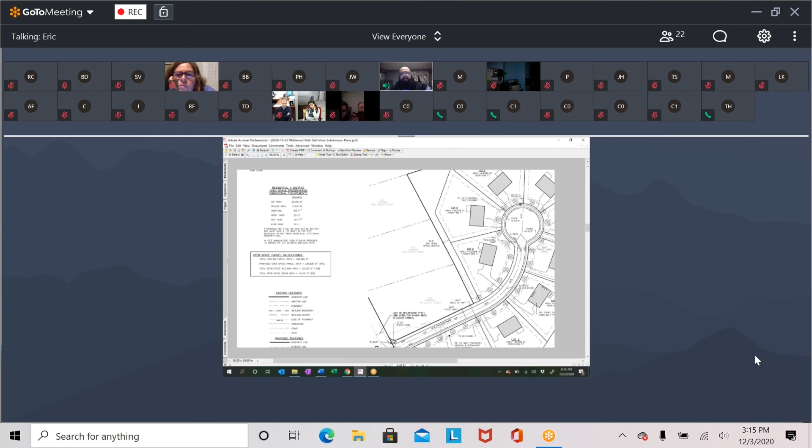We have exceeded the amount of open space required by the bylaw. In fact, if I can zoom in a little bit here, we're required to have 40%. We're at 47% open space, and that open space does contain our proposed stormwater basin, which I'll touch on in just a moment, but it is still under the threshold of what's allowable for man-made impervious structures on the open space parcel. We're proposing a roadway of just over 600 feet long. It comes to 637.5 feet long.

Standard pavement width of 22 feet, but we have proposed some waivers for the roadway cross-section to provide a right-of-way that is 40 feet wide, rather than the 50-foot wide right-of-way. I think the board has seen this before on similar open space subdivisions. It's a technique that's used really to maximize open space elsewhere and try to get the most bang for the buck there. But we are maintaining the 22-foot required paved width.

We are proposing sidewalk along one side of the roadway on the south and eastern side. That sidewalk will wrap around the cul-de-sac. We are not proposing sidewalk on the northern western side of the roadway. In its existing condition, there is no sidewalk or even curbing on Locust Street. So really 2 sidewalks, a sidewalk on either side of the street here, especially for the level of pedestrian service that we feel that we'll need, is just overkill.

Very similar with curbing, we've requested a waiver to get away from the vertical granite curbing. We are proposing granite curbing at the radii connection to Locust Street, but aside from that, we're looking at bituminous Cape Cod berm around the proposed cross-section.

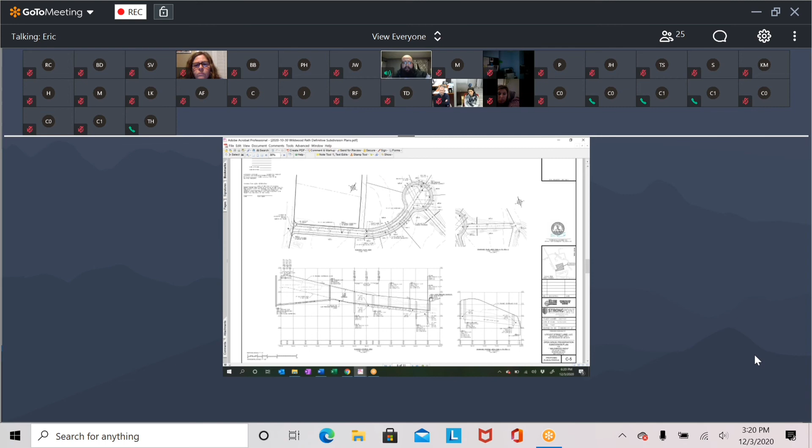Just to move through the plan set a little bit more, we have our proposed profiles that show the cut and fills that we talked about. We're matching grades very well, with the exception of the cul-de-sac. We've got about a 4-foot level of fill at the cul-de-sac, but that allows us again to have those walkout basements and really match grades around the houses a bit.

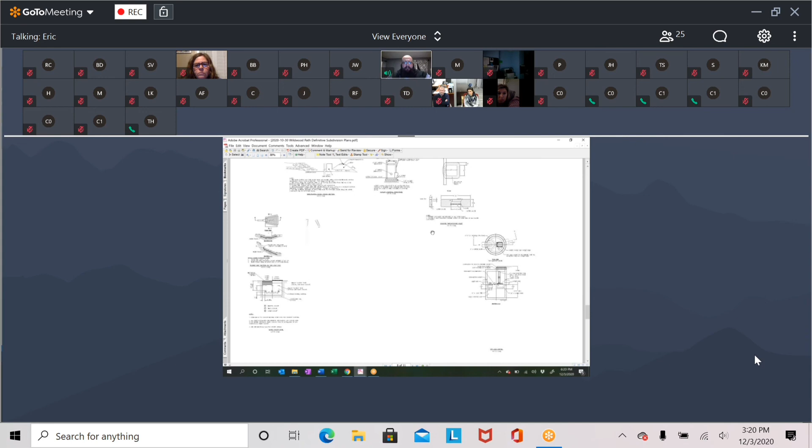We provided a full erosion and sedimentation control plan in accord with the town's requirements and the requirements of the EPA's NPDES program. And then a couple of detail sheets that I won't bother going into in too much detail, no pun intended.

And then the last sheet in our plan set is the conventional lotting plan, the proof plan, if you will, that shows that in a conventional subdivision, we could subdivide this lot into 9 single-family home lots. And that's what justifies the lot yield for the proposed open space preservation plan. So certainly this plan is the key to the special permit that we've submitted.

And then lastly, we like to provide a graphic that shows an overlay of the lot and what we're proposing, to see how it fits into the surrounding communities. Obviously, Locust Street is here, Everett Drive is over here. This gives a good approximation of where houses will sit in relation to other houses, in relation to the property lines. It shows where our limits of clearing will be. We're providing a pretty substantial buffer all the way around this property, protecting the open space.

Excuse me. I should also mention we've requested a number of waivers for this project from certain requirements of the subdivision bylaw. I can certainly go through those in any degree of detail that the board feels necessary, but I do want to note of 15 of the waivers that we proposed, I believe 7 or 8 of them are related specifically to the cross-section of the roadway. So rather than just request a blanket waiver, we've identified each particular section of the bylaw that would apply.

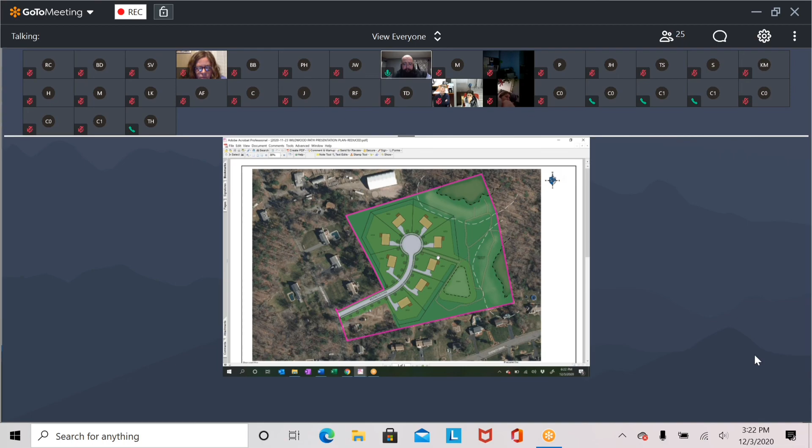I guess late today, you hopefully received correspondence from the town engineer? I don't believe I did receive anything from the town engineer. I can check my email right now. Oh, no, it's okay. If you haven't had time to look at it, you haven't had time to look at it. You do know there's an issue with the road opening, because the road was just repaved. Yes, I do know that there's been some discussion about a moratorium in place, and we will have to coordinate that with the highway department.

Some things that jumped out at me. You're going to have a sidewalk, but you don't want to have granite curbing on that side? Excuse me, I misspoke. We do have granite curbing on the side of the sidewalk. We have Cape Cod berm on the opposite side of the roadway where there is no sidewalk. That's my mistake. Okay.

The stormwater parcel, drainage parcel, you're gonna have a fence around it, and what is the slope? The basin itself is designed at a 3-to-1 slope. We have not proposed a fence around the basin at this point. It's funny you mentioned that. When we were before the board informally, one of the matters before us was a discussion about fencing around basins. And I don't know that it was clear that fencing is required or preferred in this case. So frankly, I am comfortable to put a fence or to not put a fence. I would defer to the wish of the board at that point. There's some internal discussion on that for sure.

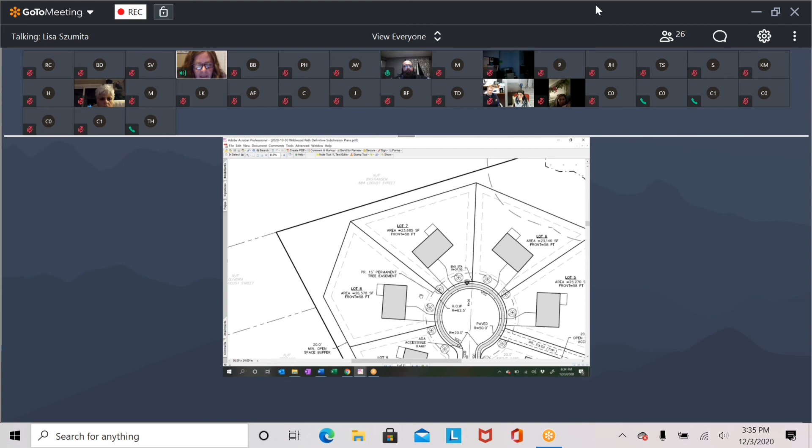My name is Lisa Szumita. I'm on Everett Drive on the other side of that parcel, and we had the same issue that we were hoping for. I think I'm speaking for most of my neighbors as well, that we wanted to have a buffer zone on our side as well, a buffer strip. And I was looking at the planning board regulations, and it says the buffer strip's supposed to be no less than 50 feet in width for an adjoining lot. So we just wanted to make sure that we didn't lose any of our privacy that we've had for all these years, that we've loved. So we're hoping that that could be taken care of as well.

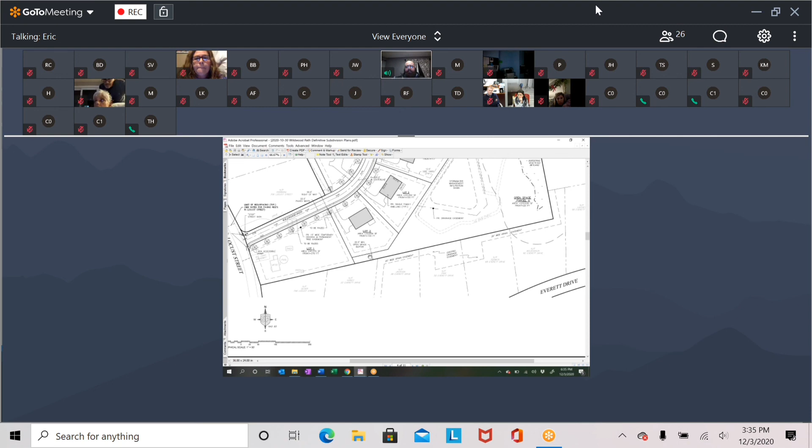So, Mr. Chair, if I may, this area here, again, is where we're proposing a minimum of a 20-foot open space, and this is right behind, and I don't know if these names are current, but this is Hardy and Jackson here. There's also a 20-foot wide drainage easement over the Jackson property here. From this location, it actually gets quite a bit wider through here. So we're talking about a 100-foot span where we put a 20-foot buffer strip, and then it widens out from there. If it's something to please the board, we could always look at doing a small no-cut easement on this lot; it would provide for another 10 or 15 feet to just make that buffer strip a little bit more substantial there.

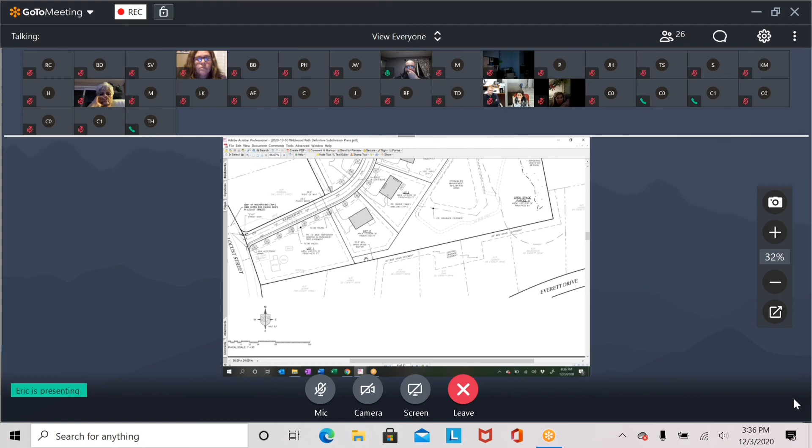One comment I want to make with regard to the required width of the buffer strip: what the bylaw says is that the board can impose a 50-foot wide but contiguous buffer if they feel it's appropriate. It's not a minimum requirement in this case. Tell me about that drainage easement. That doesn't affect the parcel we're talking about, does it? No, this drainage easement is completely off of our parcel. It backs up to the parcel. Okay. Did that answer your question, ma'am?

Yes, it looks like it's not going to affect me as much as it is some of my neighbors closer up the top of the street, but they were looking to see, I know the new neighborhood that went in off of Bar Street on Granite Street, they put in just a row of, I think, spruce trees, privacy, and so maybe if something like that could be done, just to keep that feeling of forest in that area. Not as much for me, but it looks like my neighbors need it more at the top of the street.

I mean, what they could do, this is Chris again, there's only one small section that has only a 20-foot buffer, and then it opens up to 50 to an excess of 100 feet. You could, in that short section with its 20 feet, maybe enhance it with some white pines. They start out small, but they fill in quite nice. And we would be open to that. I don't take exception to that at all. And you could dig them right out of your property. You could just simply move them. Yeah, you're right. I like cedars and arborvitaes better than white pines personally, but we can talk about that.

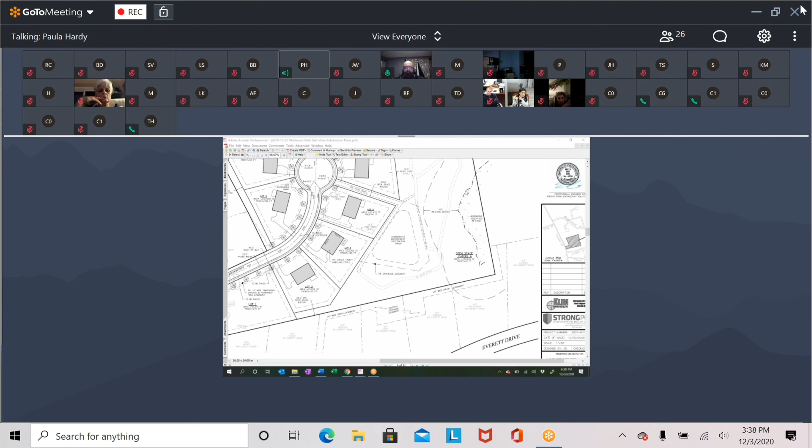Yes, this is Paula Hardy from 22 Everett Drive. So I am one of the ones that are impacted by that. So can you just repeat what you just stated, are you going to leave it at the 20 feet and add some additional trees? Or is the plan to give us additional buffer in that space?

Yeah, that's my thought, added trees or shrubbery in that space. What's there now? Do we have any say in the type of shrubbery or trees that will be placed there? You could have suggestions, yes. Okay. Could we also have it farther than the 20 feet? I know you said up to 50 feet, how can we get some additional space? 20 feet is not very much.

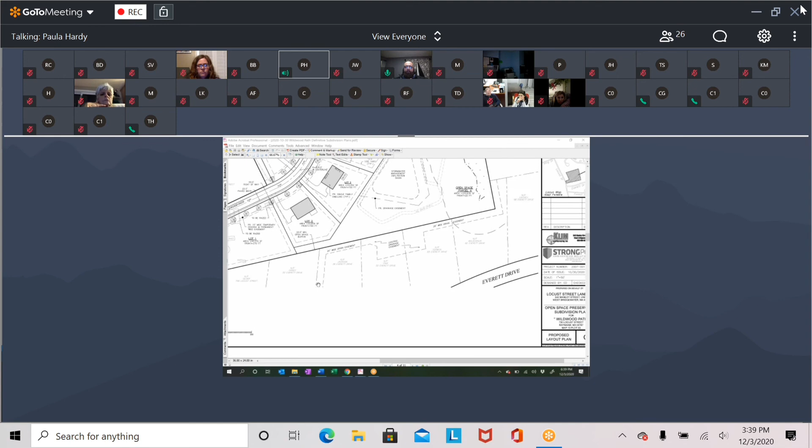Well, what we could do, Mr. Chair, if I might make a suggestion, I'm just going over to my grading sheet here. You'll see this line here is our proposed tree line. So we've got a 20-foot buffer zone, and we're not even proposing to clear within 20 feet of the property line. So what we could do is, along this line that I just crudely drew in here, add another 20-foot no-cut easement. That would effectively give a 40-foot buffer zone of natural trees there.

And I think if we did that, we would do that in lieu of additional plantings, because I feel like the additional plantings would be overkill. But we would be willing to give, on this lot in particular, a no-cut easement to provide a better visual buffer between the house on lot 2 and the Hardy and Jackson properties. Okay, talk to your client about that. Anyone else?

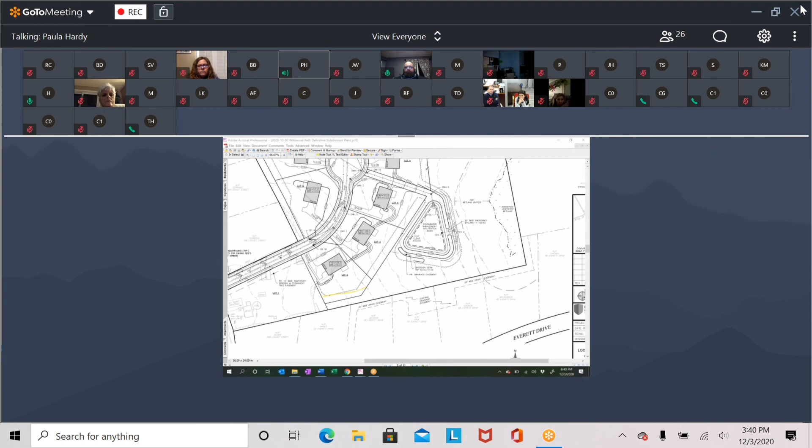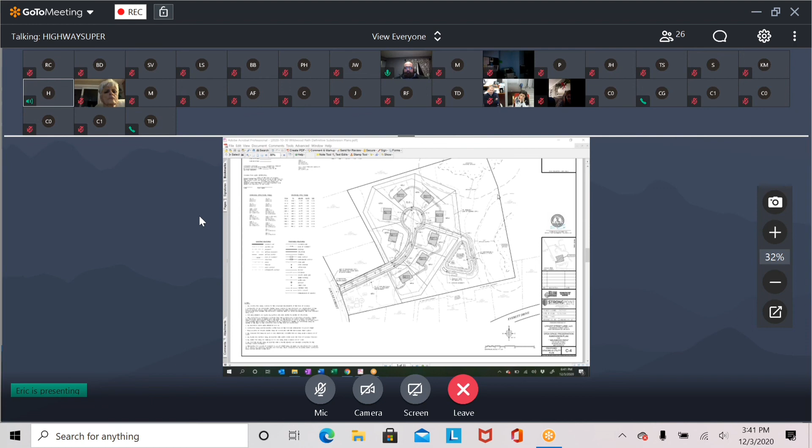I do have some comments. This is Ed from the Highway Department. I do have some comments regarding the project. Yes, Ed. Having a little problem with my microphone. I just wanted to advise the board, I sent out an email today regarding the road moratorium, separate from the review of the subdivision project. When we reviewed the project with Midge, we did it without regard to the road moratorium and just looked at the plans as they stand. So my comments regarding the subdivision are separate from the road moratorium issue.

I warned the engineer about the road opening issue. He understands and will be in touch with you. Understood. Anything else, Ed? Just that Steve and I had discussed adding 2 catch basins at the mouth of the road at the entrance to Locust to take any storm water in that location. Okay, isn't that a high point, the entrance?

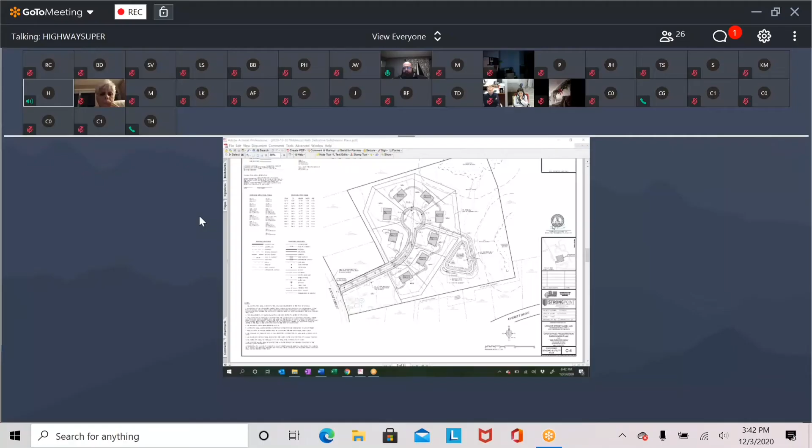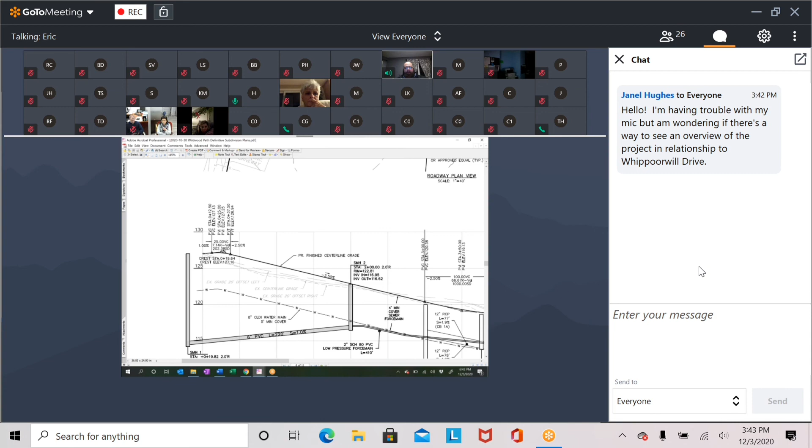What's that? The entrance where the road hits Locust. Is that a high point, a low point? Is it along a slope? I'm not averse to adding catch basins, but not if they're not gonna do anything. If I may, we actually graded a high point at Station 25 on purpose so that our water isn't sloping toward Locust, and Locust's water isn't really coming to where we are. So if there are catch basins there, they would only be taking about 25 feet of runoff from our proposed roadway.

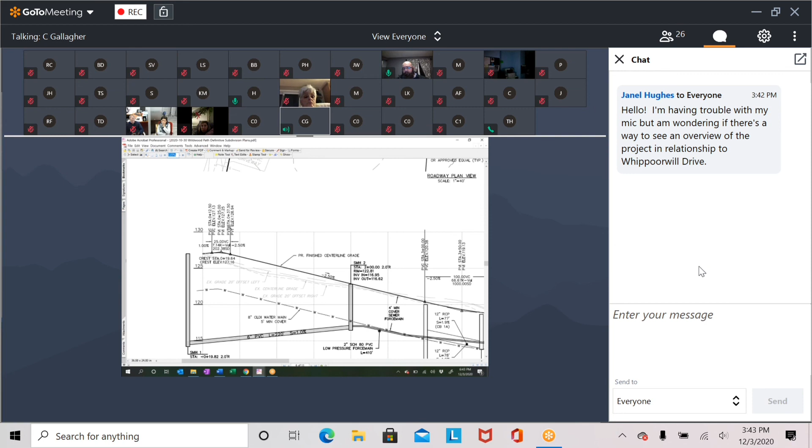Well, not really what I'm asking you. I don't have your topo sheet, I'll look at it. I'm asking about the topo on Locust Street itself. In other words, if your subdivision is entering at a higher point, then it's a waste of time putting catch basins. If it's entering at a low point that could be problematic, it might make sense to do that. Yes, I will certainly look at that. Yeah, you need to know what's going on Locust Street before you make that judgment.

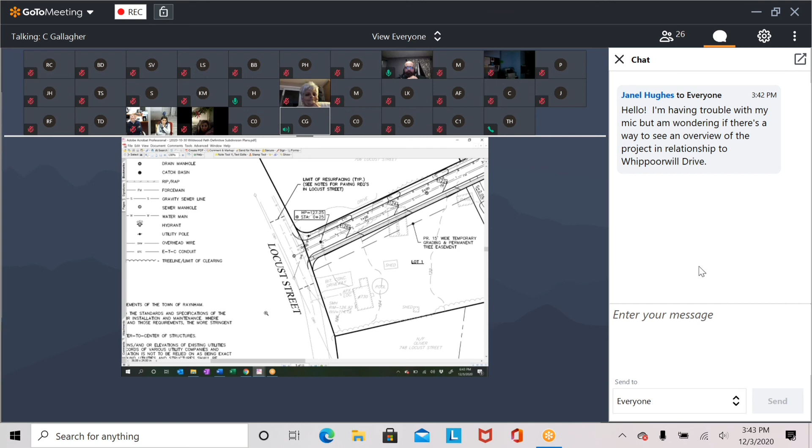Kirk, you see that question on the right? Yeah, if it's high, make sure we get accommodation for drainage on Locust Street. No, I don't see it. The question on the right-hand side, from Janel Hughes. Oh, right, I know what you're talking about. Because if you do take drainage off Locust Street, it may end up making your basin inadequate. So it would have to be coupled with an increase in basin size probably. That's right. That'd be down the line, on the town if they went that way.

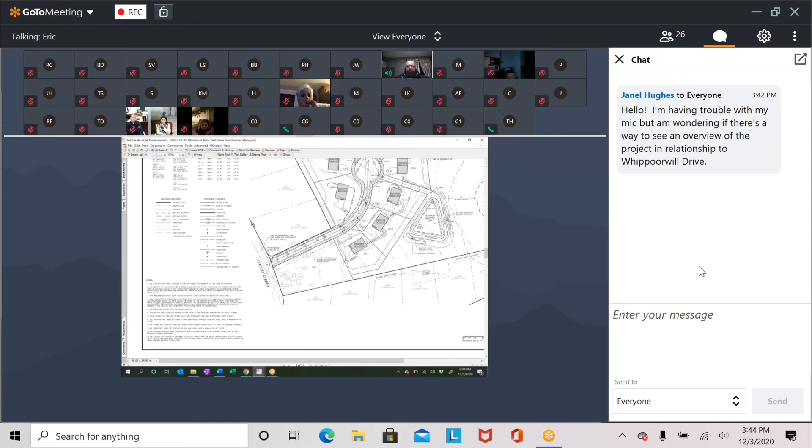We have a question from someone who's having trouble with their microphone. Where are you in relationship to Whippoorwill Drive? Let me zoom out for a minute. Whippoorwill is, let me see if I can get that. In fact, if I can zoom in on Locust Street here.

All right, so here is the site. Everett Drive is down here. Locust Street comes this way. King Street's here. Whippoorwill comes through and kind of wraps into the north of us here. I believe our open space will be backing up to an open space parcel from Whippoorwill, but don't quote me on that.

Okay, thank you. Welcome. Is there anyone else? Okay. Hi, I have a question. My name's Christina Pimenta. I'm on Whippoorwill Drive, and I was just reading the waiver application, and I'm just wondering why an environmental impact statement waiver is being requested. Don't you feel that this is important to do an environmental impact review to make sure that this subdivision isn't going to create an issue in this area?

In this case, with regard to environmental things, the project is proposed to stay completely outside of all wetland resource areas, all 100-foot buffer zones to wetland resource areas. So with regard to wildlife, wetlands, things like that, we're not concerned with there being impacts. Beyond that, the values that are given in the town's bylaw are things related to traffic and things of that nature, which, given the neighborhood that we're in, how small in the grand scheme of things this subdivision is, we're not anticipating there to be any impacts to traffic. So we thought requesting a waiver from the environmental impact statement was appropriate in this case.

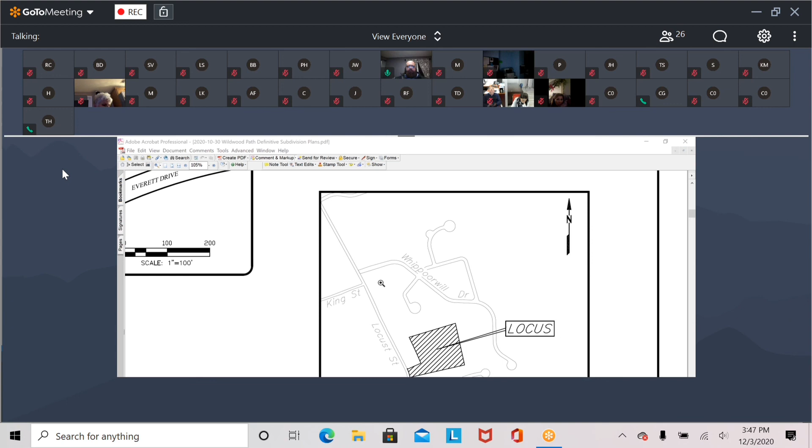Okay. Something just went haywire. Yeah. Echo. Okay, have we lost the engineer?

Our town engineer will let us know if, after walking the property, he thinks there's an environmental issue that needs to be looked into. Yeah, we can certainly comment on that, and I will just recommend maybe a memo outlining some of the highlights, typically water, sewer usage, whether there's irrigation, a quick blurb on traffic, understanding that this is a low volume, 9-lot subdivision. Don't anticipate traffic being an issue here. But that might be something to look into, and I'll just put that out there for the engineer, whether they are interested in doing something like that.

Because I know some of those environmental impact statements get into trash removal and the amount of trash, and those are standard values that are used in other subdivisions, not just in Raynham, but in other areas of the Commonwealth as well. It's something we can discuss as we go through our review. Okay, thank you. Absolutely, and we're not opposed to providing some more information on that, so I think we'll come to terms on that, no problem. Okay. Thanks. Anyone else out there?

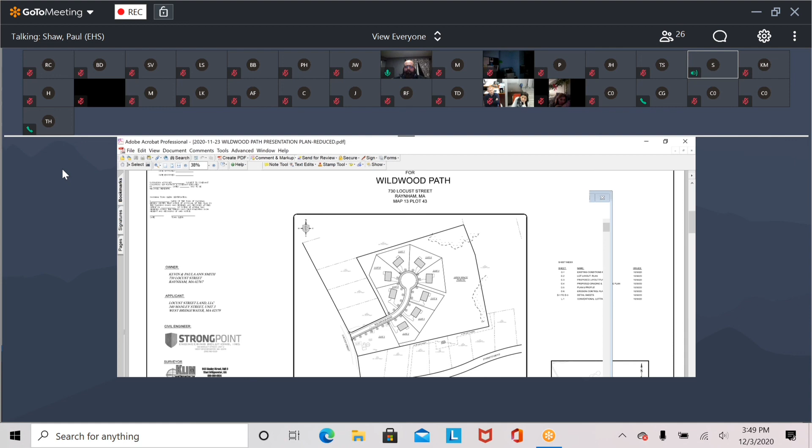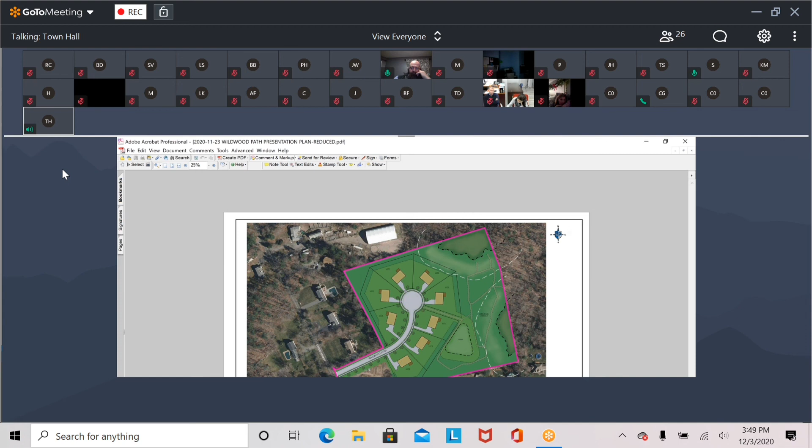Yeah, hi, this is Deb Shaw from 175 Whippoorwill. Just wanted to see if you could show us more of a larger scale as to how it will back up to Whippoorwill. I see it on the right-hand side, but I'm not seeing it. Yeah, this sheet doesn't show the relation of the subdivision to Whippoorwill, but this is kind of the best that we have to show how it blends into the surrounding community. I could take a look, maybe before the next meeting. You showed us a Locus Map, which did a good job of it, I thought. Yeah, let me pull that back up.

Yeah, sorry for all the hammering in the background. We have a Girl Scout meeting going on from home as well.

So here is the Locus Map. This is the site here. This is Whippoorwill Drive. Right. So we're quite a ways off of Whippoorwill. Well, to the north, you have the Bassin property that's between you and Whippoorwill. Right here. And then to the east, you have a substantial amount of open space before you even get to the open space on Whippoorwill. And the lots, you're probably 400 or 500 feet from any lot. Yeah, realistically, we've got to be at least that much. Okay, so you're about 400 to 500 feet from any of the backyards, right?

Yeah. Realistically speaking, nobody living on Whippoorwill will ever see this through the woods. Okay, I think that's what our concern was, just ensuring that we don't lose a lot of that woodage in our backyards. Sure. Okay, great, thank you.

Maureen, are you able to get all these names? I believe I have them all, yeah. You're doing better than I am then. Yeah, well, we'll see. Okay. Anyone else?

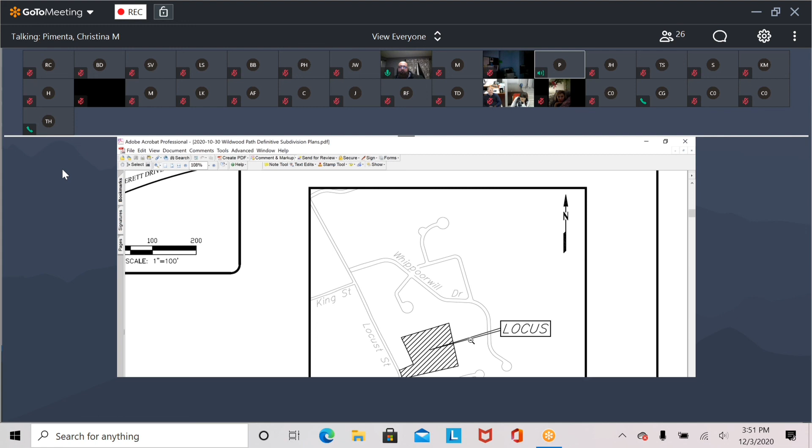Okay. Sorry, I had a second question, but I couldn't get off mute after he answered. This is Christina Pimenta again, from Whippoorwill. I don't know much about drainage, and where I am on Whippoorwill looks like I'm close to the wetlands area. So with the retention pond and the water runoff into that area, is that going to have some sort of impact draining into there that could create some sort of water issue for myself and my neighbors?

It shouldn't, but I'll let the engineer answer that. Short answer to that is no. All the drainage leaving our site, we're required to design to mitigate both flow rate and volume to the discharge point. So basically, the rule of thumb is that we can't send any more water to one place in the proposed condition than is going there in the existing condition.

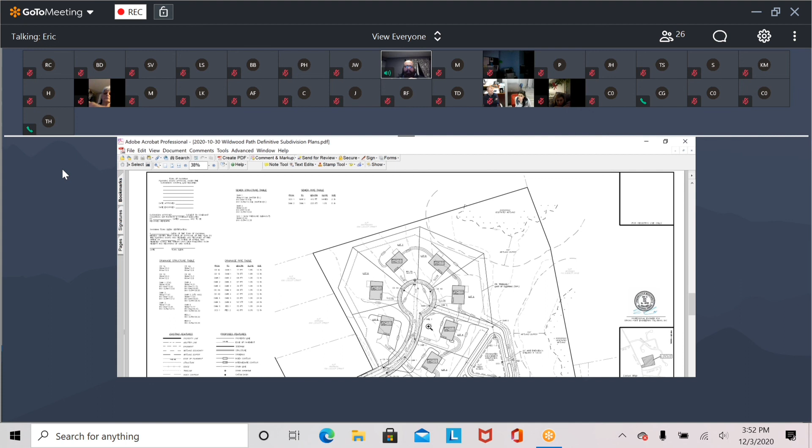So what our analysis has shown is that we're actually slowing down the water that's running to that wetland by about 5 to 10%. So this project won't result in a flooding issue or anything, especially not one that you would see on Whippoorwill so far away. Never mind the immediate neighbors. Thank you. Anyone else?

Okay, I'm going to continue the hearing. And I guess the question we should have asked right up front, are we going to have a meeting December 17th? Nobody's going anywhere, so might as well have a meeting. Okay, everybody agree with that? Okay, December 17th, would the applicant be ready to go forward with this, with more information?

We'd certainly like to try to be, if we can put it on for the 17th, and if for some reason we're not able to, we'll request a continuance as we get a little bit closer. Is that okay? That's okay with us, yes. Okay, great. I'm putting this on for 6:10 PM on December 17th. Okay, thank you all for your input. Excellent. Thank you all for your time. We appreciate it.

Next up at 6:50, continued public hearing on 454 South Street West, Central Glass. Hi, Tracy Gilmore here on behalf of the applicant Central Glass. And Brian Dunn with MDL Land Development and Permitting for Central Glass as well. Hello there. Hello, Mr. Chairman, members of the planning board. What has happened since our last meeting?

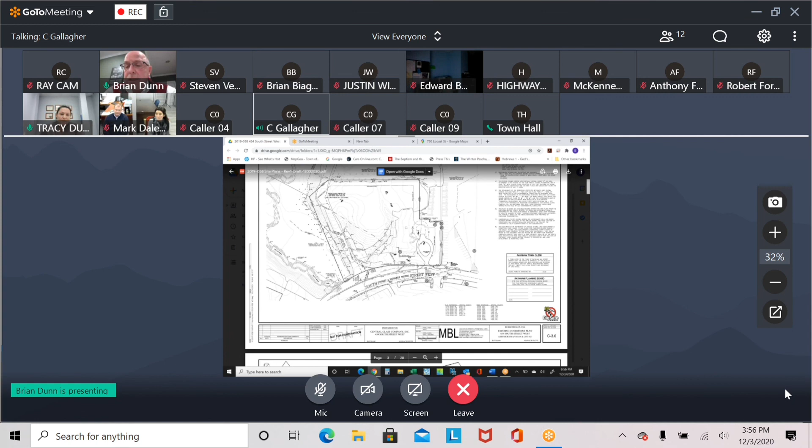Are these changes going to mean much to us, or would you be better served going through them with Steve before the next meeting? No, Chris, actually, some of them go to the placement of the parking around the building and whatnot, which was really a concern of the members of the planning board during the last meeting. I don't think that you were in attendance during that meeting. First meeting, so before I do any action on it, I'm going to have to review the minutes and the tape for the last meeting. Okay?

All right, can everybody see the glass to the ground and bollards and sidewalks? And if you caught the news today, somebody just drove their SUV through a Panera Bread this afternoon. Yeah. Well, I think that you're going to be pleasantly pleased with what we're about to show you. Okay?

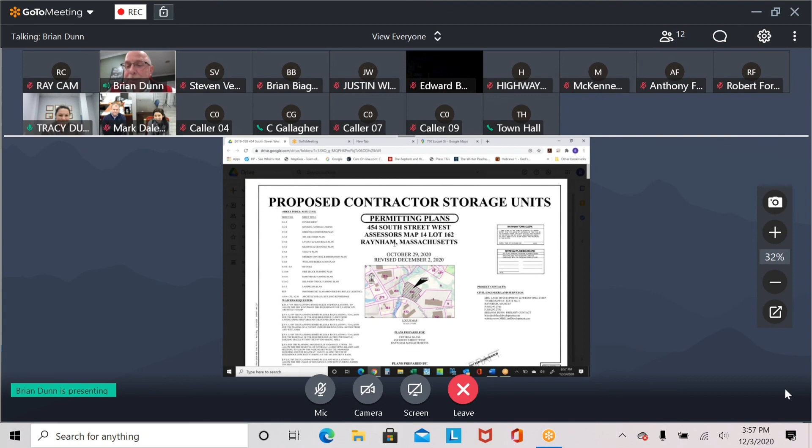Okay. Before, Brian. Yeah, here we are. Can everybody see the plan now? What's the date on that? What sheet is it and what's the date on it? This should be C4, and what is this? It has yesterday's date. And they are just stamped draft plans because we just wanted to have something for this meeting for discussion to go over the layout changes before we finalize the plans and the architecturals. Okay?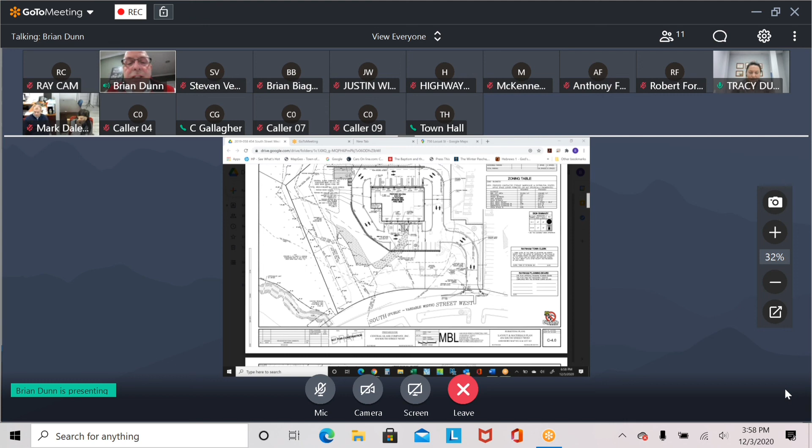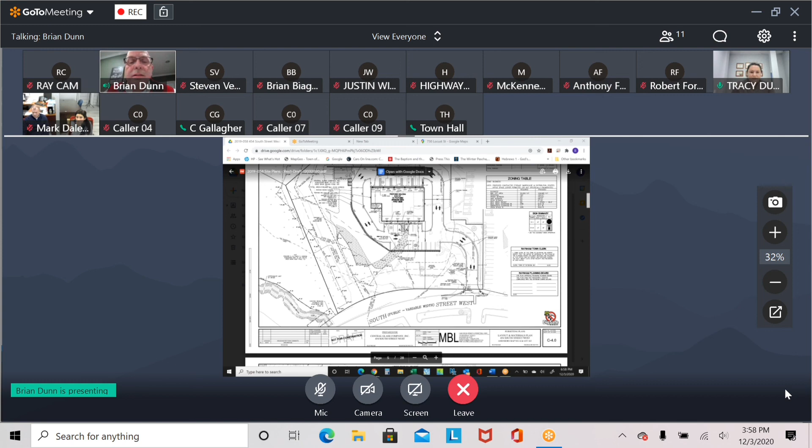So, during the last meeting, I'll go over some of the stuff, and then Tracy, you can chime in here and there if I need something else. So, as you can see in the front of the building, we added a sidewalk to the entrance here. Everybody can see my mouse, correct? Yes. We can. Okay, so we've added a sidewalk here. We've got the concrete bumpers and a full reveal sidewalk, 6 inches. We moved the handicap spaces to this location of the building. There's a new handicap ramp here.

If you remember, Mr. Chairman, members of the planning board, we had handicap over here before with no sidewalk and just entrance doors here. We've added the sidewalk in the back as well. And then we've revised the back of the building too, to allow for bollards on either side of the entrance doors, the man doors, and to allow for the parking to have some protection of the building in the back as well. Yeah, so the architect actually shrunk the building 3 feet in the back to allow for that 3-foot painted walkway so that the doors aren't opening out into the parking aisle in the back of the building.

So this was probably the big takeaway from the meeting that we had last time with the planning board. So we wanted to make sure that this was the right direction that you were looking for, because I thought that we heard that some of the members weren't in favor of granting the plan if the parking was right up against the building. It's true. It's too bad. The original plan sure looked good, but safety issues are more important. Understood. So we listened to what you had to say, and we made those revisions to the plans.

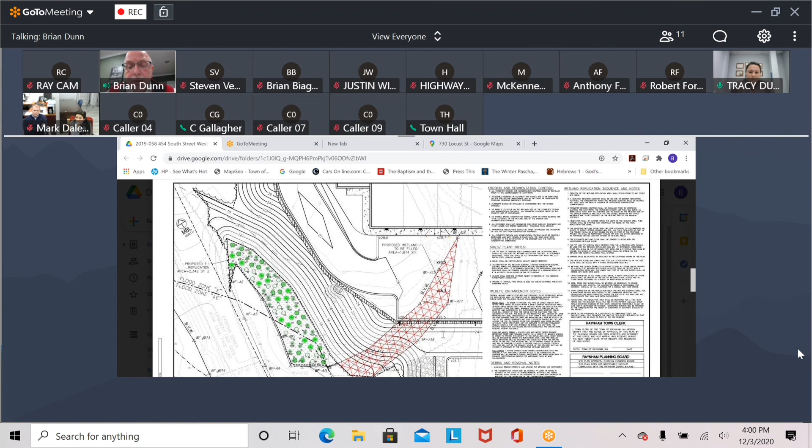We also updated the lighting plan, which is part of that package, based on some of the comments we received on lighting, and we also added the sight distances. That was one of the other concerns that the planning board had. So we put those on the landscaping plan. Let me get to that. So you can see we did the sight distance measurement, and if the car was here, at the new entrance, then we're about 335 feet to the right, towards the west, and then over here, another 335 feet of sight distance to the east. So we're able to verify how far we can see from that new entrance, which is in the vicinity of the existing driveway that was there before.

Could you bring the map up a little? We can't see the street, there you go. I know there's not much you can do on this site, but you are awfully close to your neighbor's lot line.

Right, so we heard what you had to say about that too, in regards to the existing curbing that's out there. Originally, we had vertical granite at the front entrance of this new proposed driveway, Mr. Chairman. And then, trying to put granite curbing into the Cape Cod berm probably would be a little bit more problematic. So we're saying have the Cape Cod berm match into the existing Cape Cod berm that's out there adjacent to the parking area for the flea market.

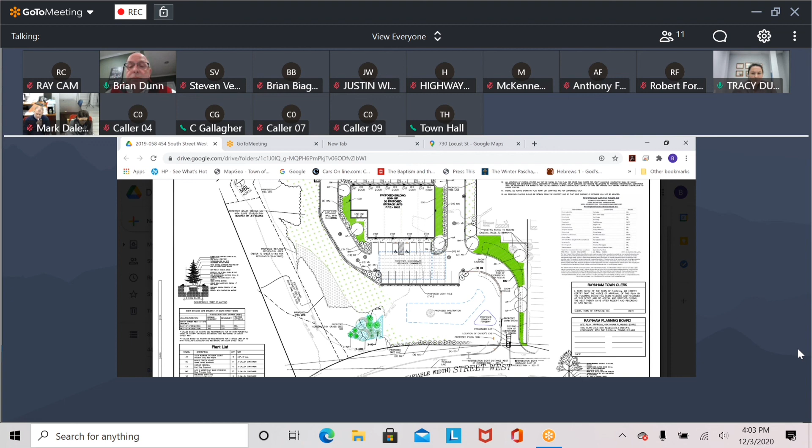And then we did update the lighting plan. But I think that Steve was looking for a little bit more off-site stuff in regards to like 50 feet or more. It's close to it. So, but I mean, it does show that we're zeroing out at the property line already, so we're very close to it. And then the pole heights are on the plan. You can see them a little bit clearer here on the table in regards to the pole heights and the mounting heights. How many poles are there and how high are they going to be?

Right now, the pole height, mounting height will be 15 feet. And you have 3 of them in the front and 4 of them out back? Yeah, so 1, 2, 3 in the front, 1, 2, 3, 4 in the back. And then we have the wall packs on the front of the building, 1, 2, 3, 4 in the front, and 1, 2, 3, 4 in the back. And then there's also one on either side of the east and west side of the building. One here and one here.

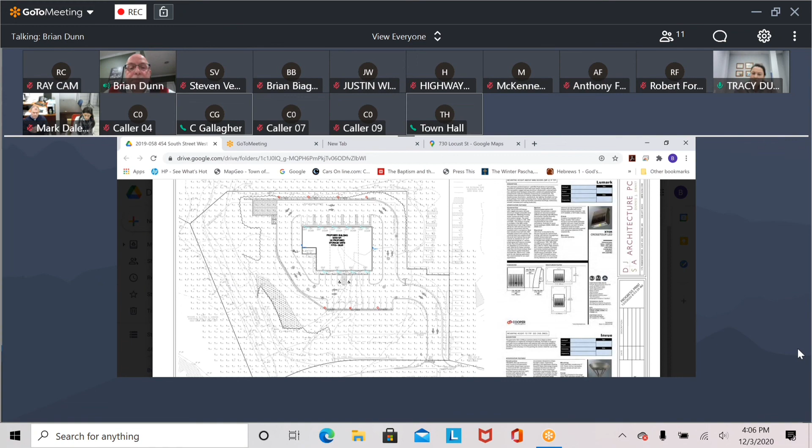So the back property line is all wetlands. Let me get to the existing conditions plan, Mr. Chairman. So here's the existing conditions plan. You see that okay? Yes. Okay, so here is our property site in the middle. Here is the flea market to the right. You can see the accessible parking in this area here. And then this is all wetlands and wooded area in the back here.

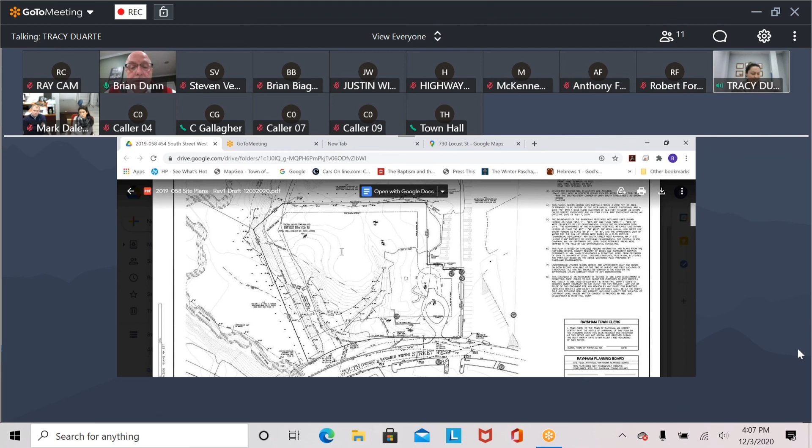Once you get past those woods at the back, what is there? In other words, when do you ever get to any residential? Oh, I think about 300 feet, Brian, sheet C31 is the 300-foot abutters plan. And we show the 300-foot abutters radii. So there's a subdivision, it's more than 300 feet out. Right at that residential A line, so that's probably about 400 feet out. Okay, thank you. Yeah, that backs almost Camel Way, I think. Way back. If you look at the locus on the front map, it's quite a ways out. Yeah.

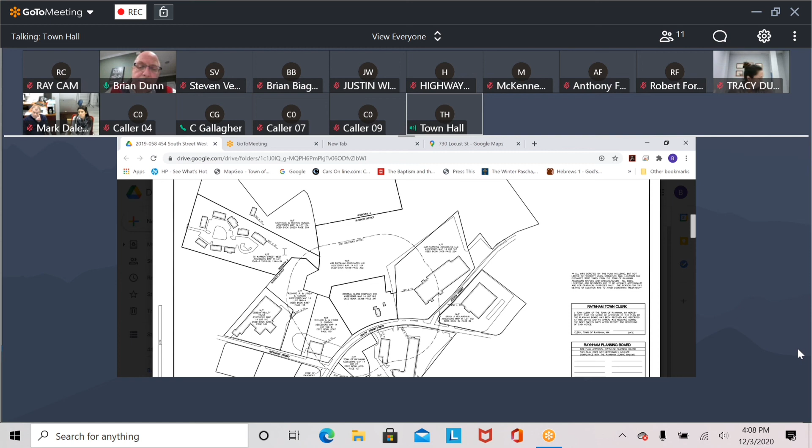So, Mr. Chairman, this is really the direction we're going with on the revised set of site plans. I think that all of the other comments that Steve and his staff had from Nitsch Engineering can be readily addressed and sent out to him for review, so we can have another meeting on December 17th, if you're okay with the changes that we've made so far based on your comments. Well, I have a paper plan, and your layout and materials plan is October 29th. Do we have any plans that are newer than that? Yeah, the plans that we sent to Maureen this morning should have a revision date of 12/2 on the lower left-hand side of the sheet. I don't think we submitted any paper copies to the planning board. No, we have them electronically today, 12/2. Okay.

So, I'm not seeing bollards along the sidewalk in the front. What we put was concrete bumpers in front of the monolithic sidewalk, and there'll be 2 bollards in front of the accessible spaces to hold the signs. Well, we need bollards in front of any parking space. We can add that. Like to have bollards instead of the bumpers. All the bumpers, yeah. I was just gonna say, the architect also added that 2-foot wall around the front of the building that you saw previously around the side. A 2-foot stone wall.

Yeah, so in the front of the building, instead of having it flush, there's a 2-foot wall. It's part of the foundation. It doesn't protect the people on the sidewalk. Plus you have the sliding automatic doors. You just go right through that. You have people on the sidewalk who aren't protected, and you have doors that open, there's no protection there. Would rather bollards. You're gonna have a hard time convincing us of anything but bollards. Okay, loud and clear. I mean, the other option would be planters, but they probably intrude on the sidewalk.

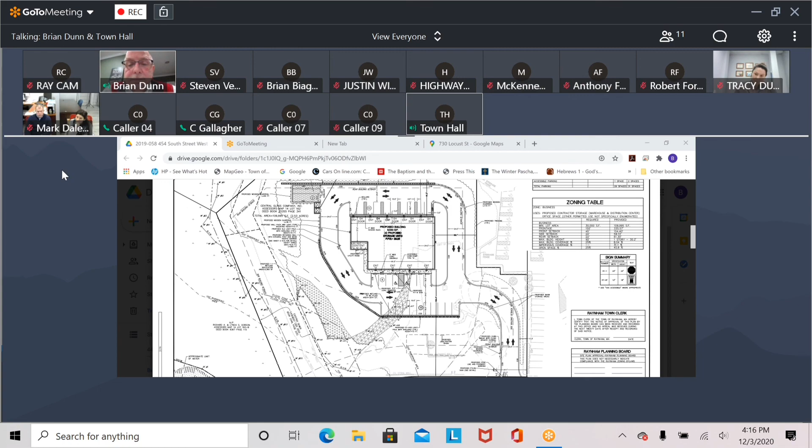Anybody have anything else to say tonight? No? All right, Brian, are you ready to go on December 17th? We should be ready to go on December 17th. All right, I'm continuing this hearing till 6:15 on the 17th of December. Maureen, time to act? January 2nd. January 2nd, so we'll need to either make a decision or get an extension of time.

I think that we should be in good shape to be within that time frame. But if we have to, we would definitely extend that time frame for you, Mr. Chairman. Okay. The hearing is continued. Thank you.

Great, thank you so much. Mr. Chairman, members of the planning board, really appreciate it. Have a great night, everybody.

Next up at 7:15, public hearing, continued public hearing on 1776, 1788 Broadway. Do we have an applicant out there? Yes, Mr. Chairman. My name is Bob Forbes with Zenith Consulting Engineers, and also the applicant himself, Anthony Ferrara, is here as well. Hello there. Okay, what do you have for us today?

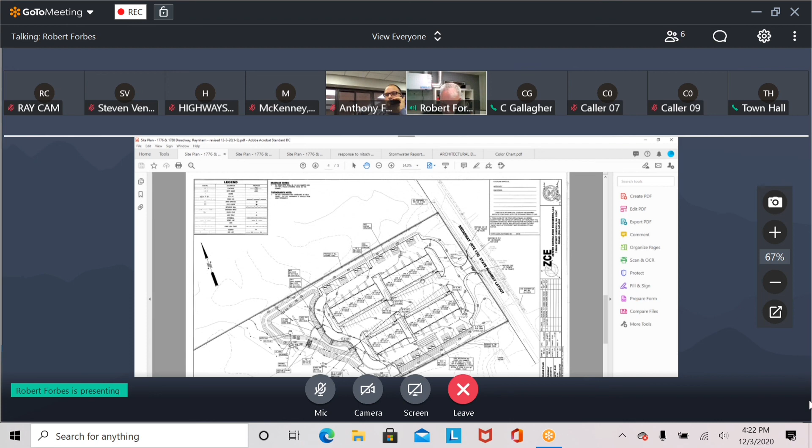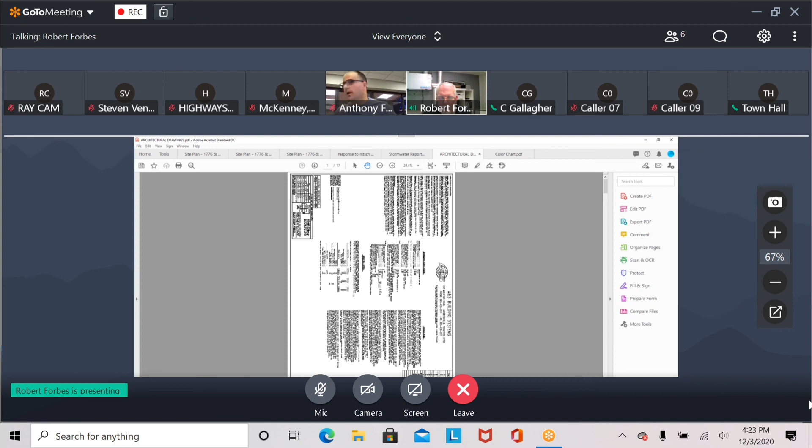And the other one was for the requirement for the plans to be at a scale of either 1 inch equals 20 feet or 1 inch equals 40 feet. And these are 1 inch equals 30 feet. So I did discuss that with the board last time. And let me bring up the architecturals. Tony, do you want to talk about these at all? You're not on, Tony. You gotta unmute yourself. You hear now? Yep, now I can hear you.

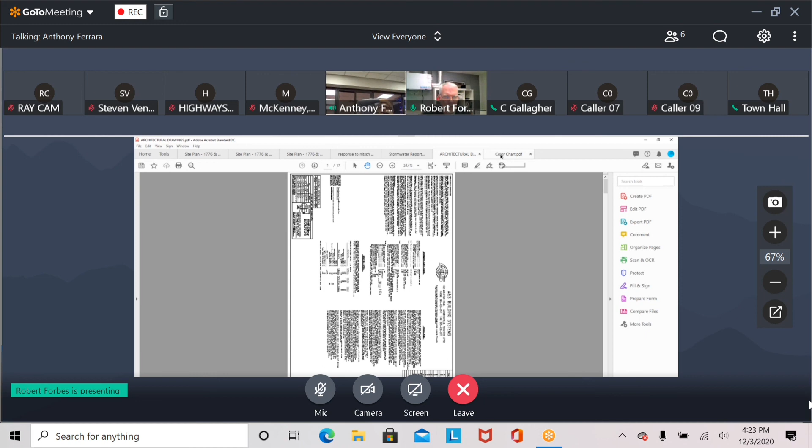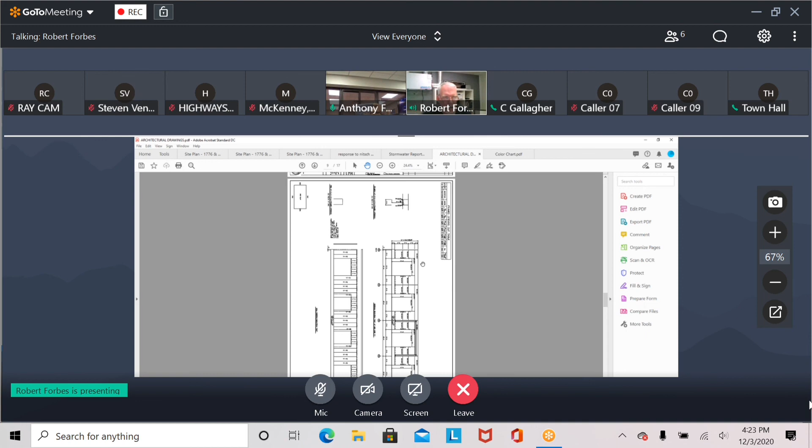We chose the ash gray with a charcoal gray roof, and all the trim will be charcoal gray. So the side of the building, I believe, is going to be ash gray, and the roof charcoal gray. Is that what you said, Tony? That's correct. And if the board wants to have any input on that, I think Tony would certainly want to discuss that with you. Any board members have any choice of colors, or we're fine with? Okay. Yeah, we'll go with your colors. Okay.

If you two don't have anything to add right now, Steve Ventresca, you still there? I am, Mr. Chairman, still here, and as Mr. Forbes stated, we worked together earlier this afternoon just to come to an understanding and agreement that because that infiltration system could not meet that 2 foot separation requirement from the stormwater handbook, and that they had sufficient capacity in their basin and in their second recharge system, that it made sense just to eliminate that first system.